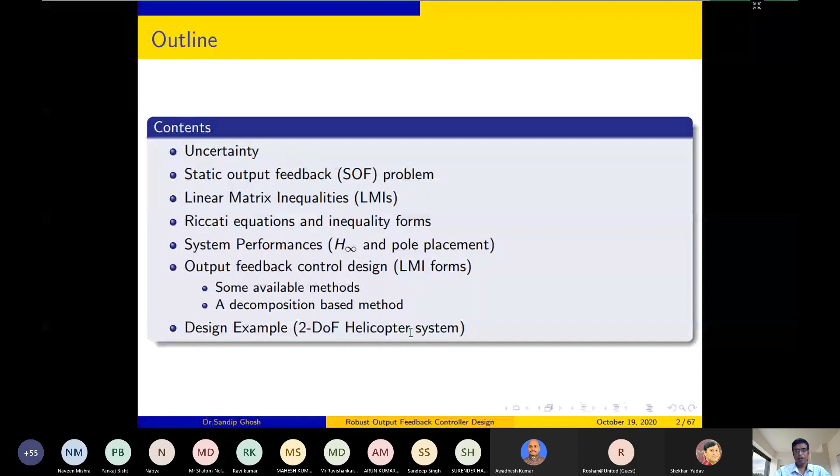So there could be many more texts, but I will highlight only the portion that are relevant to this presentation. Texts one can go through for more details beyond what I speak.

So if you start with uncertain systems, it's well known that no mathematical system can exactly model a physical one, and modeling errors affect the performance of a feedback control system. So the objective often turns out, in presence of modeling uncertainty or uncertainties in the system model, how to control a system.

The approaches, mostly we are acquainted with these approaches, if we list out, broadly they can be categorized as robust control, model predictive control, and adaptive control. So I will discuss this robust control portion, particularly in the face of uncertainties, how that can be controlled and what is the objective of robust control.

Rather, I won't discuss or compare with the other two control mechanisms that can handle uncertainties.

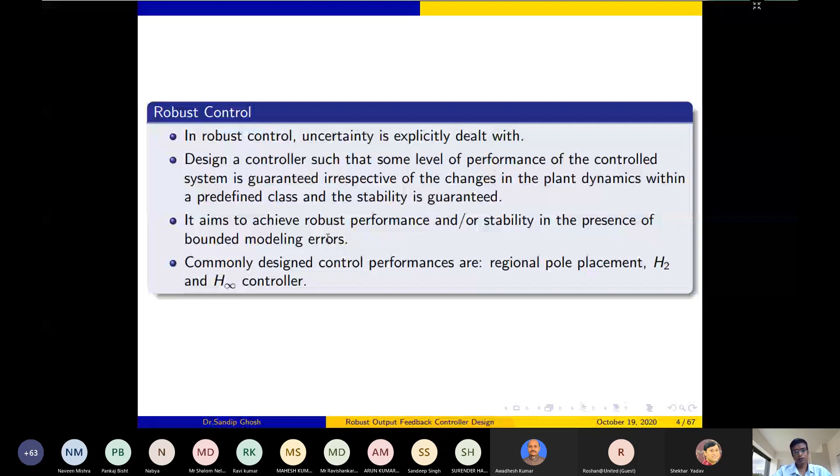I'll go through mostly state space based methods, won't go to the transfer function based interpretation for the uncertainties and corresponding performances. We'll deal with state space models, particularly the MIMO system case when there are multiple inputs and multiple outputs.

So if you consider first the robust stability, what is robust stability? If we consider a system as x dot t equal to A x t, let's say this is an autonomous system with no input, how can we say that the system is stable or not?

So if this system is considered to be uncertain, that this A matrix is uncertain and it belongs to a set, that this A matrix takes values from this set at different instants of time, we say the system is robustly stable if it is asymptotically stable for all A belonging to this set.

So that does mean something - if you consider an element of this A matrix, and the range of that parameter, and try to find whether the system is stable for each and every parameter, then you will get an infinite number of points. And that is the difficulty in solving this robust stability problem or handling the uncertainty problem.

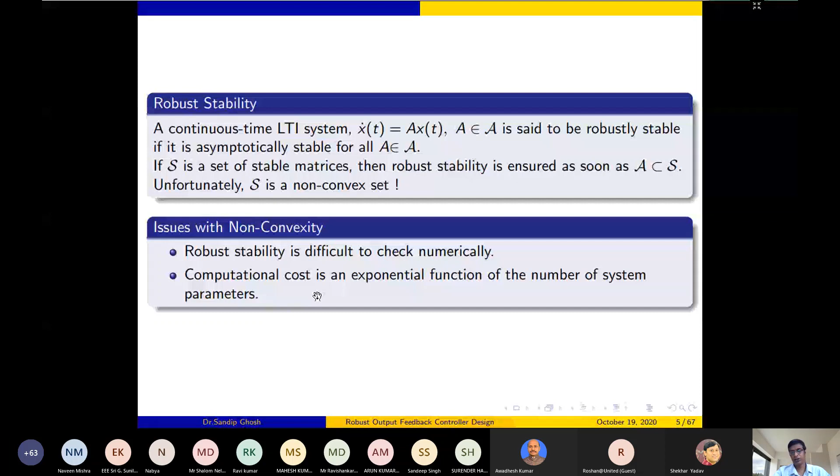That means computationally intractable, and I won't go into the convex and non-convex discussions here, but I'll mention that robust stability, from that non-convexity viewpoint, is difficult to check numerically for a given problem and data set. The computational cost is an exponential function of the number of system parameters, so as the number of uncertain system parameters increases, the computational cost increases.

This gives a difficulty: when you approximate the model to a SISO system and then implement that design on the overall system together, there will be performance deviation. So the problem becomes whether we can design the 3 controllers all together or not - then you have to deal with this as a MIMO control design problem.

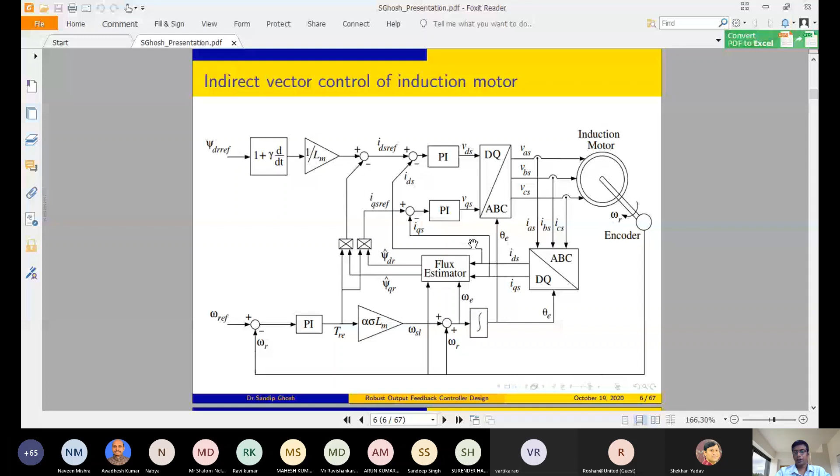So we'll start with system representation. In state space model, we define X as the state and represent its dynamics as X dot equal to a function of X, U and T. U is the control input, X is the state, and output Y is G, a function of X, U, T. We often linearize the system dynamics and represent it in linear form: x dot equal to Ax plus Bu, and y equal to Cx plus Du. A, B, C, D are matrices of appropriate dimension corresponding to the system.

I kept this S as an argument to represent that it could be a static gain or a dynamic one, meaning this could be a transfer function. For static output feedback, you choose K equal to a constant gain. If you look at this feedback structure, this is the most desirable structure - when you first look at a system given a linear model, this will be the first controller you try to design for the system.

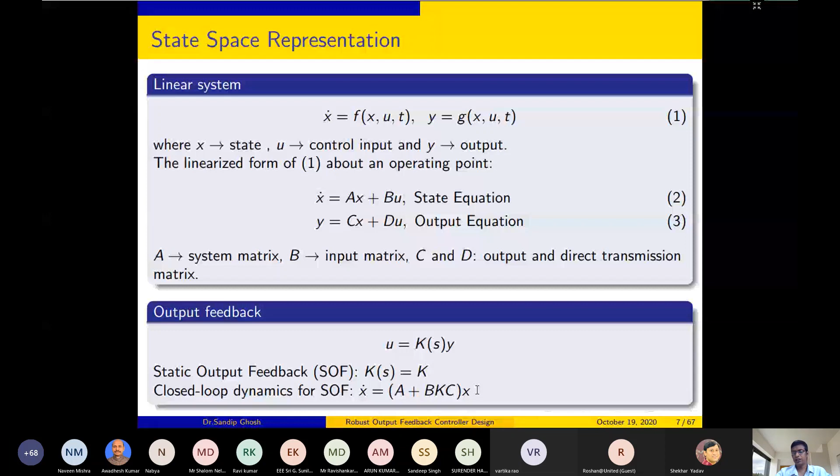Then other sort of controllers, not only that static gain, other controllers, for example, the controller has dynamics as well. Such controllers can also be represented in static output feedback form. For example, if you consider a dynamic controller that has dynamics, then this XC is the controller state: XC dot equal to AC XC plus BC Y. And the input to the plant will be U equal to CC XC plus DC Y. This AC, BC, CC, DC are the controller parameters to be designed.

So if you try to design such a controller, then how to design this? If you consider that this controller state XC has only a single state, then that will be a first order dynamic controller. And you can think of a corresponding transfer function, similar to a compensator structure.

Lag or lead compensator, as you have seen conventionally. Then if you consider higher order, for example, there are two states in this XC, then you will get a second order transfer function, and so on.

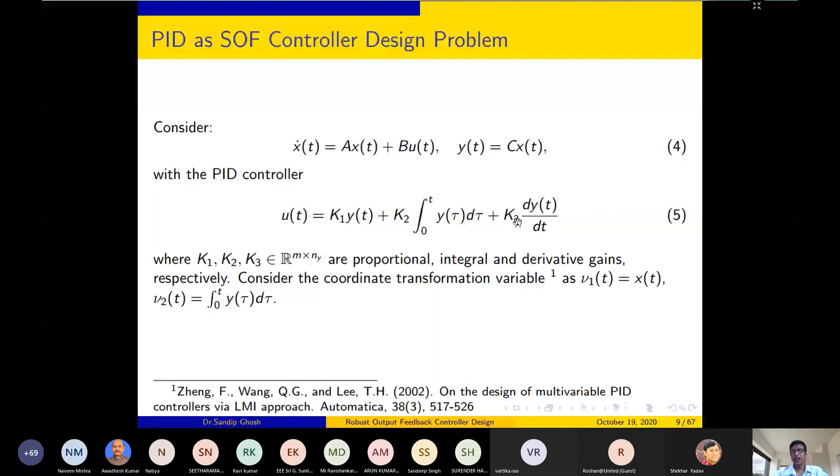Except that this K3 dY term, as you replace YT equal to CXT, gets combined to the left hand side, and then you can manipulate and find a general form like this. So this again comes into that same linear system form.

And if you consider that this term is invertible, particularly corresponding to the derivative gain, if we can keep this invertible, then UT again you can choose as a static feedback controller with K bar to be designed. And this K bar contains the PID gain control parameters K1, K2 and K3. So this maps back to the PID gain parameters. So if you can design this K bar as a static output feedback problem, then you can compute back K1, K2 and K3, the gain parameters.

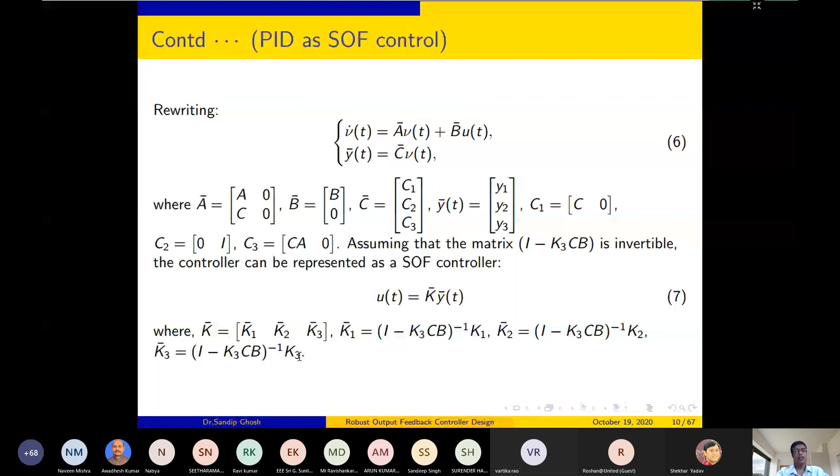So many such problems can be represented as a static output feedback problem. Then the question arises, what are the difficulties with such design?

You will see other situations, for example, the induction motor example I put up at the beginning. In that case, restricted feedback is present. That means from one particular output to another particular input, there won't be any connection, and you are forcing those elements to be equal to zero. For example, only the diagonal elements are non-zero and are to be designed. So for this case, we call it strictly decentralized.

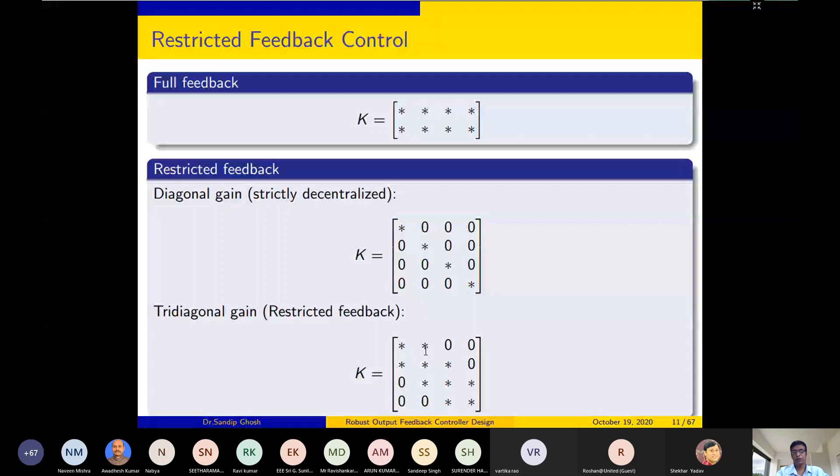So the first attempt can be made. I will introduce the tool that can be used for solving such problems: the linear matrix inequalities framework.

For a linear matrix inequality, you have decision variables to find out, x1 up to xn, and f0 to fn, these matrices are known. x1 to xn are variables that have to be found satisfying this less than 0 criteria, that this matrix fx is less than 0. When inequalities are in such form, they are called linear matrix inequalities, because x1 to xn, the parameters to be found, are in linear form. If you consider this one is 0, otherwise it is affine form, but it is commonly called linear matrix inequalities.

Many control problems can be represented as linear matrix inequalities. For example, the Lyapunov stability case: given a system x dot equal to Ax, how to say whether the system is stable or not in the Lyapunov sense comes as a linear matrix inequality, A transpose x plus x A transpose less than 0, with x greater than 0. You try to find an x satisfying these two inequalities, which is itself greater than 0, and this condition is also satisfied for given A.

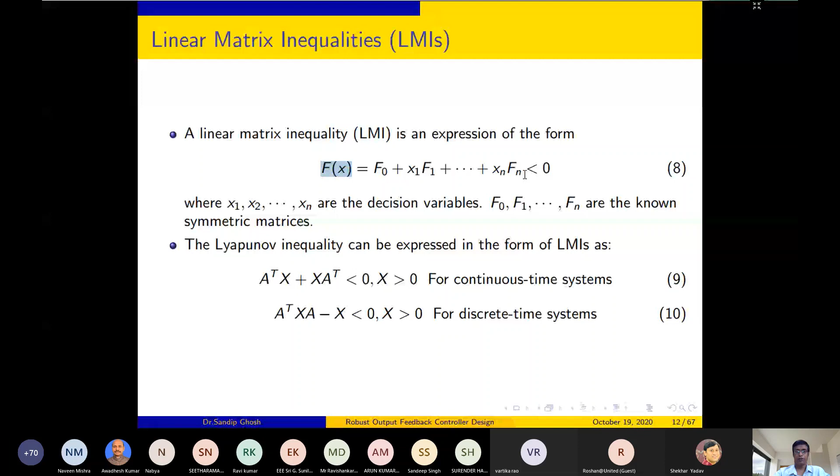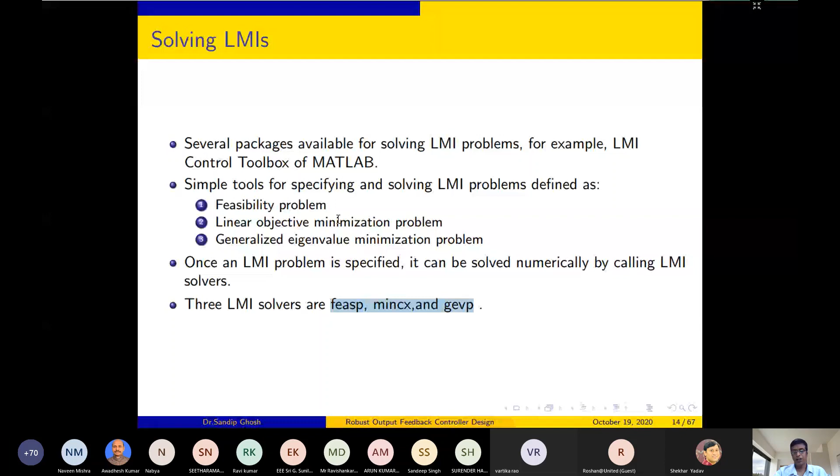These are the three MATLAB-based LMI control toolbox solvers available, corresponding to these three LMI problems. I will demonstrate the first one: the feasibility problem.

The feasibility problem is this: x equals, these are the decision variables. X is a vector containing x1 to xn, and it satisfies F(x) greater than 0, this inequality problem, where F is a matrix.

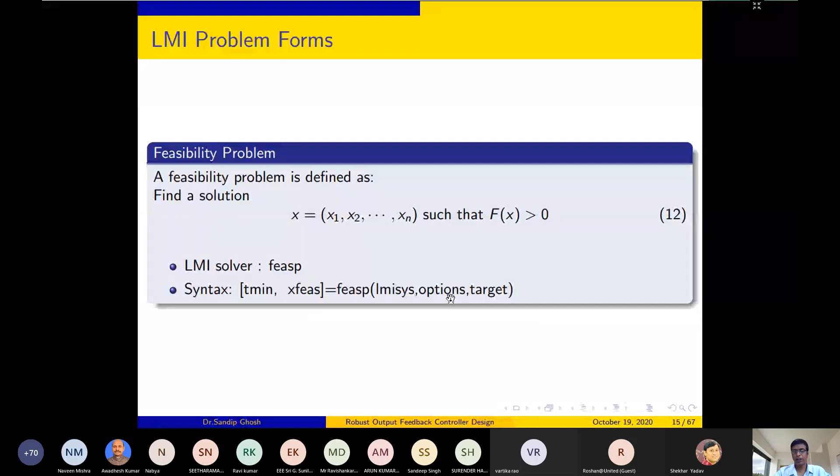The corresponding LMI solver is FEASP, and this is the feasp command in the MATLAB LMI control toolbox. If you see the MATLAB code you have to write for this, consider that these are the two inequalities, and you have to solve for P.

Consider the problem of solving P greater than I and A transpose P plus P A less than 0 - that's a stability problem. Input parameter A is known, a 2 by 2 matrix, and these are the two LMIs, how we define them in terms of the defining variables and these inequalities, then finally we call our solver.

First we define that P is an LMI variable; its structure/syntax is so. Then we define the two inequalities: the first one corresponds to P greater than I, and the second one corresponds to the other inequality.

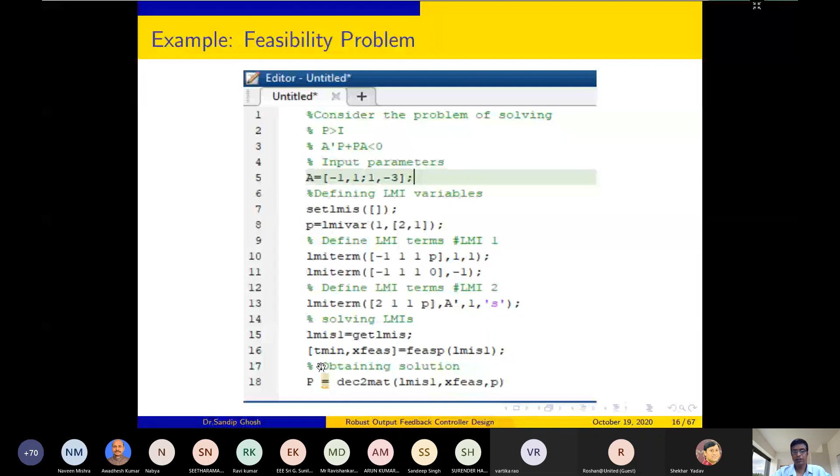Then we accumulate all the LMI terms that we defined, and call the FEASP solver to solve this, getting back P from the solution. This is what the solution looks like - it converged and gave a feasible solution.

The best value of T is this, and it should be negative for feasibility. T value should be negative for feasibility, so this was a feasible solution.

If you extract the p-value, this is a p-value from the set of possible p's. I say set of possible p's because this is an inequality, so it may be feasible for several different p, and it just gives a particular solution corresponding to the whole possible set of p that satisfies this inequality.

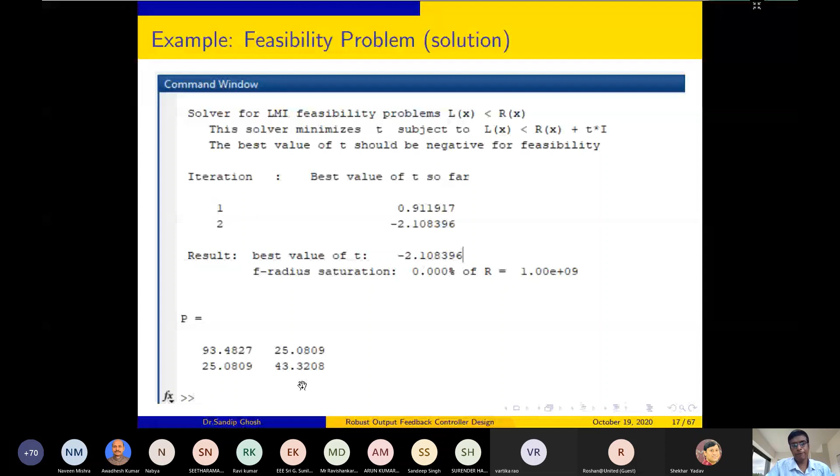Then the other problem is the linear objective minimization problem. Here, not only is the constraint fx greater than 0 present, but an optimization objective is also added.

You can see this is the combination of the decision variable C transpose X, with C a known vector. As you multiply C transpose X, this will be a linear combination of the vector elements x1 to xn, and you can solve this using the mincx command.

If you look at the syntax for solving such a linear objective minimization problem, here is an example: minimize trace of x subject to these constraints. This can be represented - even though this x multiplication is there - you can represent it in this form.

This is an LMI, and correspondingly the A, B and Q values are given.

Similar to the previous case, you define the LMI variable, define these LMI terms using these syntaxes corresponding to this set less than 0. Then call the mincx function to solve this, and finally obtain the solution that minimizes this linear objective.

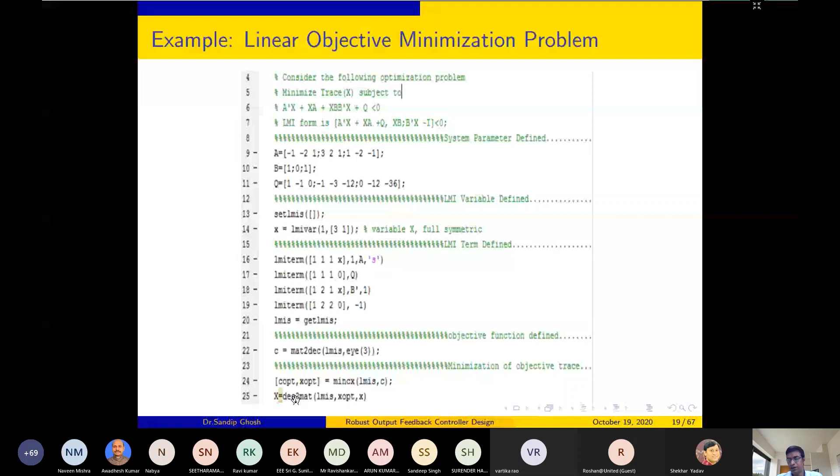So solving an LMI problem numerically is easy. Toolboxes are available, and if you can frame a problem as an LMI problem, then it gives a global solution, because this is a convex problem. So if a solution exists or it converges to a solution, then obviously there exists a feasible set, and if it does not, then there does not exist a feasible set.

And it is solved using iterations. I'm not going into details of the algorithms used to solve it, but you can see that it is solved using iteration, and finally it converges to a particular minimized value.

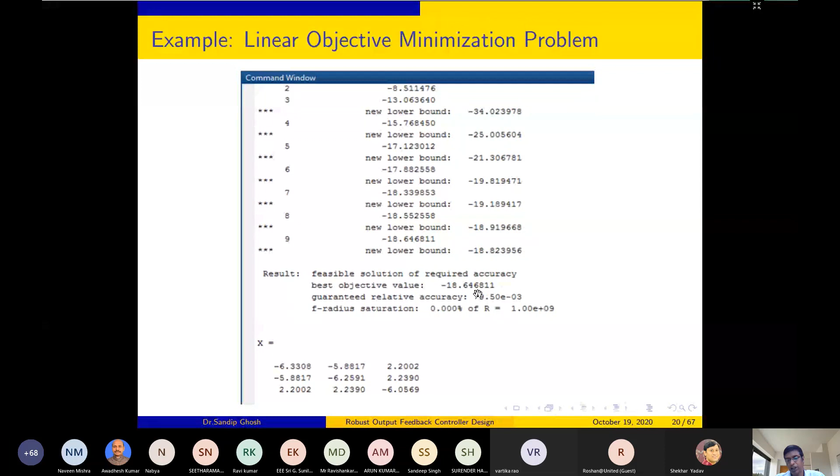I'll move on from here, and we'll show formulation of matrix inequality or linear matrix inequalities problems for some of the simple cases, and we'll show some of the solutions for complex cases.

So here we introduce that stability, quadratic stability, which is the downstream of Lyapunov stability. For nominal systems case, x dot equal to Ax, we consider a Lyapunov function as x transpose P x, where P greater than 0 is a positive definite matrix.

Then the states will converge gradually, because V(x) is defined over this x. So as the value of V decreases over time, this x will decay, given that P is constant. So that shows how x will approach its origin or the equilibrium point for linear systems.

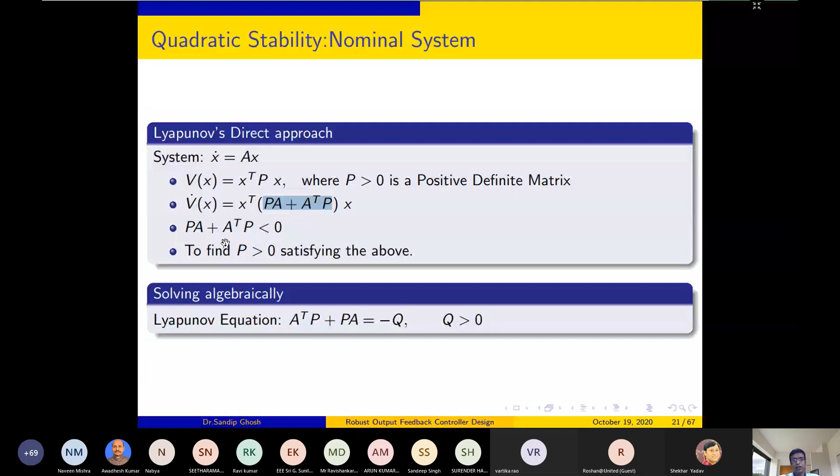But the alternate form of this is that you solve this condition as an LMI and find a solution P greater than 0.

The same if we try to extend for the robust analysis case, particularly when the A matrix is uncertain, then how to represent that problem or how to tackle that problem.

So we'll say that a control law is robust if it is valid over the whole range of admissible uncertainties, mostly offline design. That's why it is cheap, particularly for implementation. And the difficulty is that the uncertainty modeling is difficult. You should have known the parameter variations for a particular parameter. If you consider uncertainty, you should measure that this varies within this to this range. So that information should be known.

Obviously, there are other cases when this is not known. Still, you can consider a range of that and do trial and error. So the robust stability is difficult to check, as I discussed at the beginning, and this is exponential in the system parameters.

So the solution could be in that quadratic analysis framework using Lyapunov's direct approach, where we define V and we ensure that V dot is less than 0. So if this is less than 0, then what happens? Then states will come to the equilibrium point because this V will decay and x will decay.

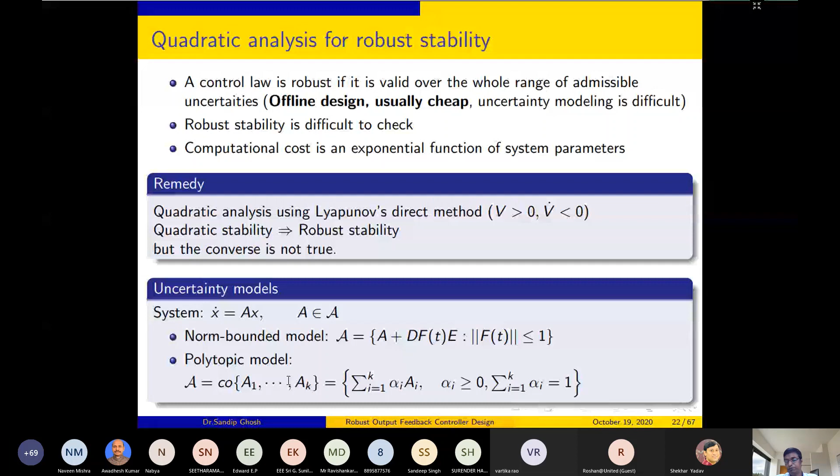For this representation, or for the linear system case, the benefit is that the particular structure of the Lyapunov matrix is known to us for linear systems, and that works. This structure is known: X transpose P X, with P greater than 0. Then as you take the bound for this, replacing it in V dot, you get a condition like this.

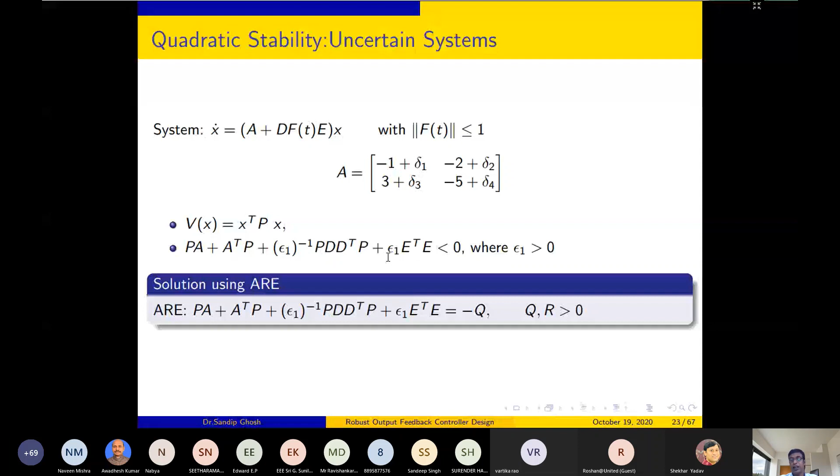Consider the state feedback stabilization problem. The objective is x dot equal to Ax plus Bu, and u equal to Kx. Then the closed loop system becomes A plus BK, and the stability condition will be A plus BK transpose into P, as you replace A plus BK in place of A, this will be less than 0.

This appears to require finding both P and K, and as you multiply, this will involve P, B, K, and there will be multiplication of P and K elements. So it appears as a bilinear matrix inequality, because multiplication of two elements is involved, and you will get P1 and K1, elements of P and K, whose multiplication gets involved.

In the Riccati form, we generally assume a particular structure of K, minus R inverse B transpose P, replace K here, equate this right hand side with minus Q, represent this again in Riccati form, and solve for P to find K. In the LMI framework, even though this looks like not a linear matrix inequality, you can still convert it into one.

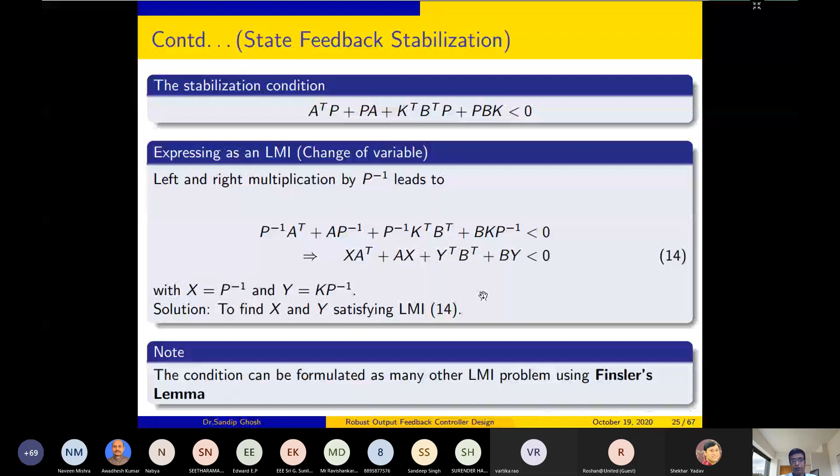So many such problems can be represented as an LMI problem, and we can solve and check that numerically. This is the case for solving the state feedback stabilization problem for polytopic systems.

As I equal to 1, you will have one inequality involving X. If I equal to 2, you will have another inequality, but X remains the same. So for all the I's, you define all the inequalities, write them, and solve for that single X satisfying all the I cases.

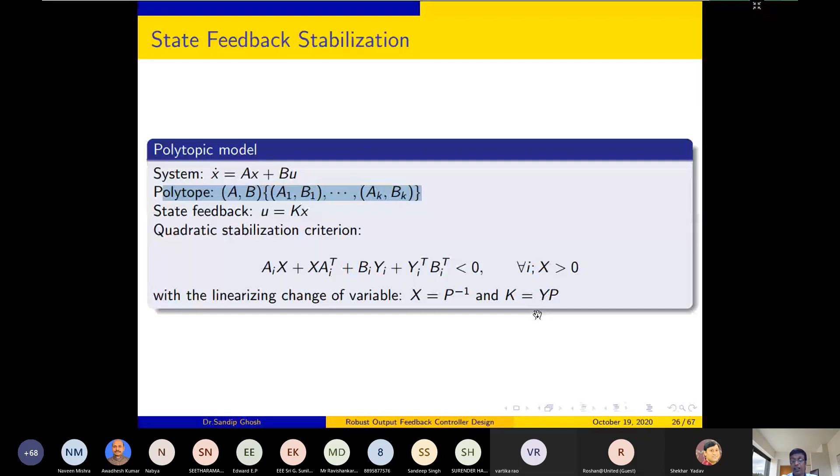When you have two poles, we can map that damping ratio to the second order case. But when you have several poles in a higher order system, then it's very difficult to do that.

So rather than that, if you can say that all the poles are within this damping region, then minimum damping criteria is satisfied. So whatever be the number of complex poles, if they satisfy this minimum damping, their combined response will be this damped response of all these combinations. So this is one of the basic performance criteria when you design controllers, that minimum damping is satisfied.

Other criteria often given is that it satisfies minimum decay rate. So it's not the imaginary axis, but slightly shifted towards left with this alpha value specified, as e to the power minus alpha t. That will be the minimum decay rate that defines how fast the system poles will decay. If alpha is large, then your poles will decay fast, and if alpha is small, then it will decay slow.

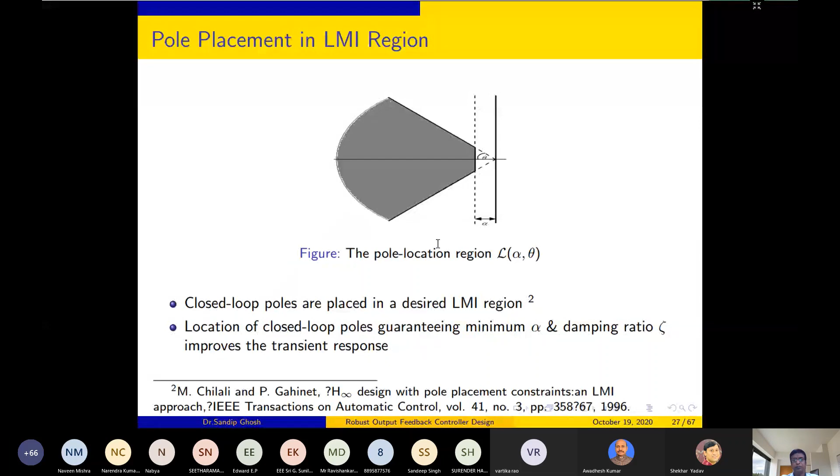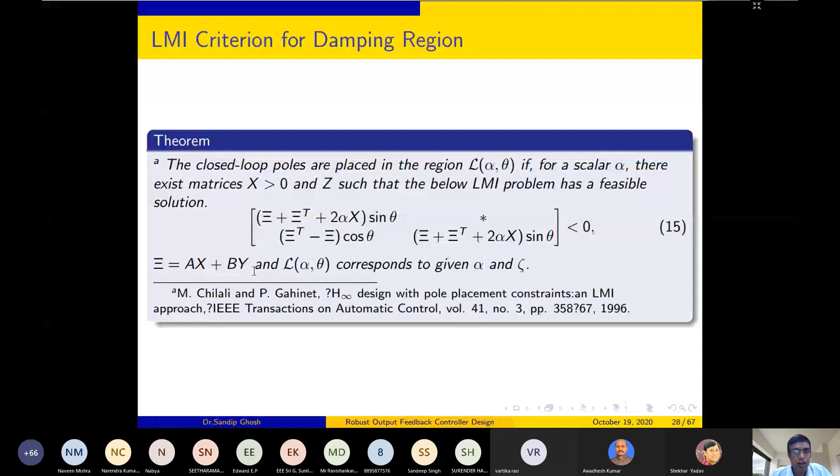Then other performance criteria are that the H infinity state feedback controller. So for H infinity control, from an input or disturbance input to a desired output, the transfer function's infinity gain is less than gamma. And if you can minimize this gamma and consider that the input is a disturbance and the output is a desired one, then from that particular input to output, the gain will be minimum. The H infinity gain will be minimum. So that is one of the performance criteria.

Often dealt with in robust control framework. But however, the modeling of uncertainties, how those are modeled, and designing in the H infinity framework, those interpretations and definitions are not discussed in this lecture. But still, for some problems or in some cases, we can define it directly from the state space model. For example, the nonlinearity that we neglect while obtaining a linear model, those we can consider as disturbances. Then there are other modeling efforts so that this disturbance and the corresponding desired output can be modeled.

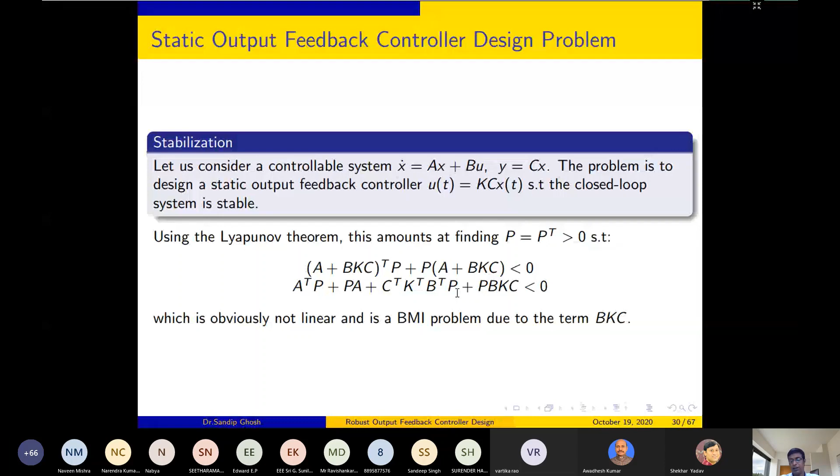Some of the approaches available: people have developed how to convert this, how to approximate this as an LMI. So we'll see some of the approaches. For example, this is an iterative LMI method.

In this iterative LMI method, that particular inequality is converted into this form. This one you can further represent as an LMI, given that this x is known, and this p and k are variable. So then this will be an LMI, and this will be an approximated version of this, with x equal to p.

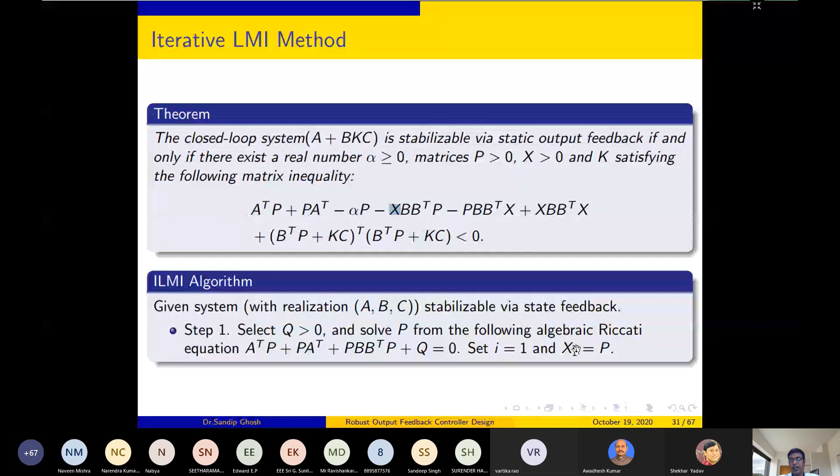So what happens? We want to solve for this p with some initial value of x, and then iterate over this so that x and p converge to each other. First a solution for p is obtained, and then x for the first iteration is assigned equal to p. Then iterate: once x is known or an initial value is taken, you solve this as an LMI, then go on solving and updating the x value using this p so that it converges to some solution.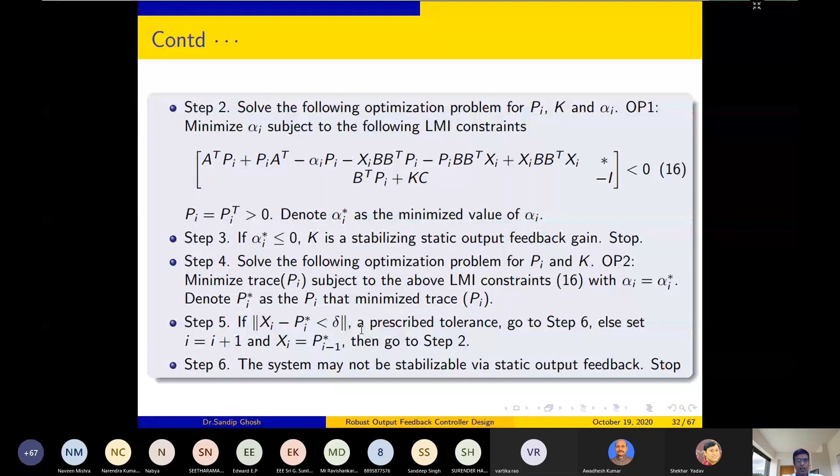So step 2 will be, for the ith iteration, solve this optimization objective. Then finally, when the norm of x minus p is less than delta, some pre-specified value of error, then you will say that it has converged. So that is one of the iterative methods for solving the static output feedback problem.

Other ways are that you directly approximate that bilinear matrix inequality as best as possible and represent it as an LMI itself, rather than iterating over x and p.

So this will be a general representation of the H-infinity control problem: x dot t equal to a x t plus b w w t plus b u t. This is the control input. This one will be treated as the disturbance input to the system. This is the measured output, meaning y t will be used to construct the control input, and this is the desired output — desired in the sense that we'll try to minimize the infinity norm corresponding to this input to this output. In cases you can consider y t equal to z t if it is not appropriately defined.

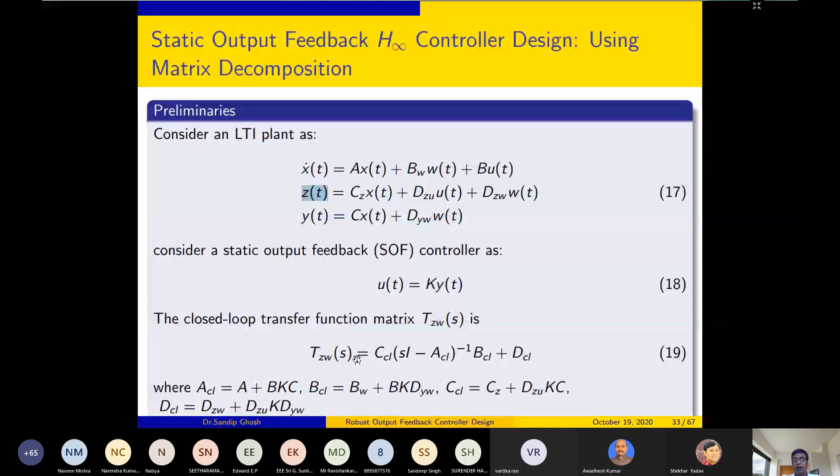Then if you take a static output feedback for this, the closed loop system for w to z will look like this, with the parameters defined this way. Then we'll try to minimize the infinity norm for this, and that you do using the BRL lemma, the bounded real lemma.

This is the result corresponding to the bounded real lemma: the infinity norm of T_zw is less than gamma, and the closed loop system matrix is Hurwitz, meaning stable, if there exists this P greater than 0 satisfying this inequality. So this A_CL contains the BKC term, and when multiplied with P, this becomes a bilinear matrix inequality, which is difficult to solve.

An alternate form of this is that if you pre- and post-multiply by P inverse, you get that X is post-multiplied to this A_CL compared to P multiplied to this A_CL.

Since BKC is involved, we approximate this using the range space and null space of the C matrix. So the Lyapunov matrix X is decomposed using QC and RC, these two matrices.

And if you write Y equal to KCX, this term comes as YC into RC transpose plus this nonlinear term. YC into RC transpose basically gives us K back with this change of variable, but you have to take care of these nonlinear terms.

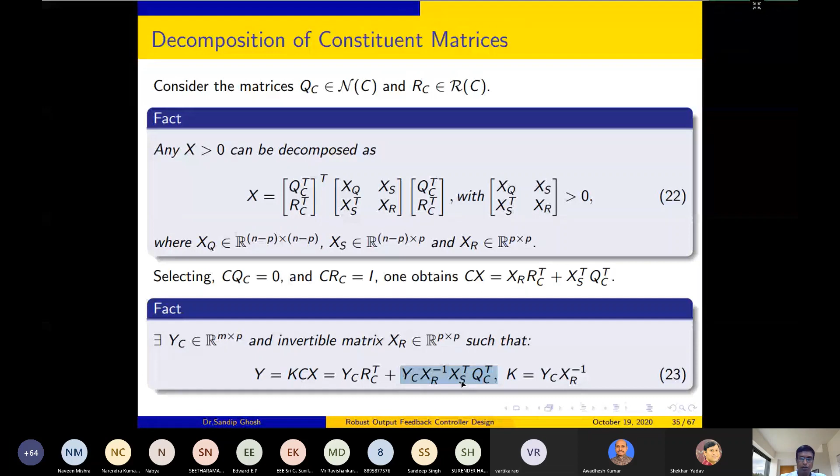So we take care of that by further manipulation and obtain an LMI corresponding to this, and it will look like this condition for the static output feedback control problem. So if you find a solution for this that is less than 0, with appropriately defined system matrices and variables, then T_zw will be less than gamma.

So that is one of the approaches, obtaining a sufficient condition corresponding to that bilinear matrix inequality for the static output feedback problem. The benefit is that if you find a solution for this, many control problems can be solved using this algorithm. And obviously, since approximations are involved as I've shown, these conditions are sufficient and conservative — they may not capture the exact optimal conditions. So there is always hope for improvement in such designs.

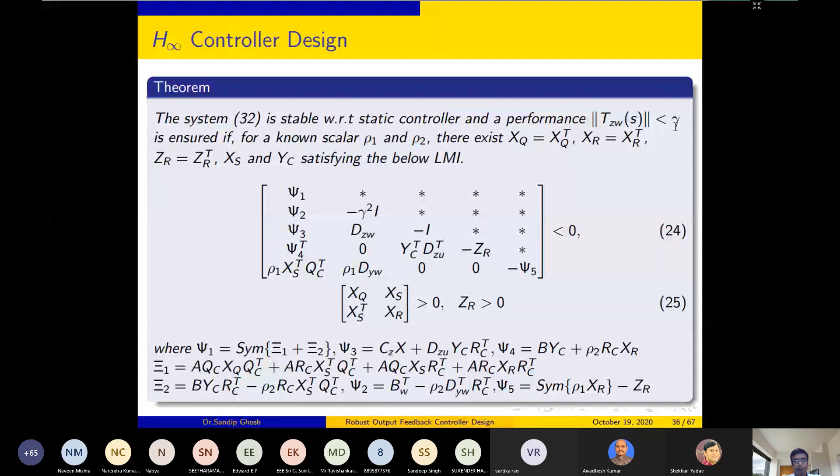So then you design a controller K equal to this. In this LMI framework, compared to what we did for the algebraic Riccati equation, this is the structured form of K you can design. For example, if K has elements K11, K12, and certain elements are not there—they equal zero—then you consider the variable XR to be diagonal, and YC takes the structure of K. If you solve this LMI, you get back the control gain in this particular form, which you can then apply to your system.

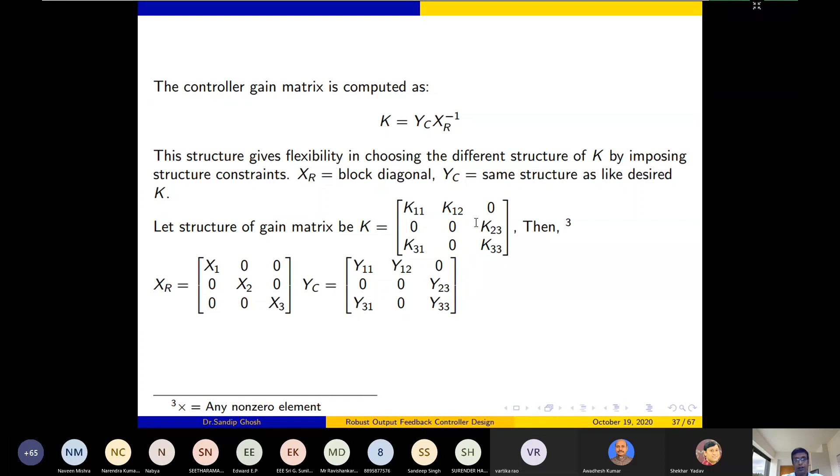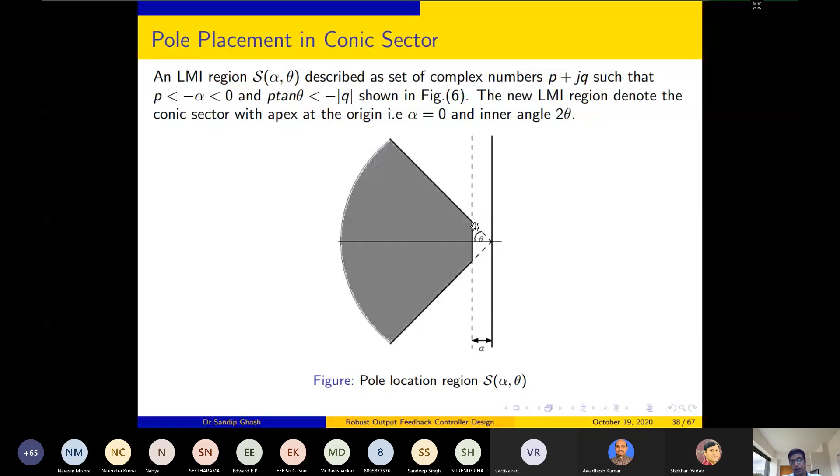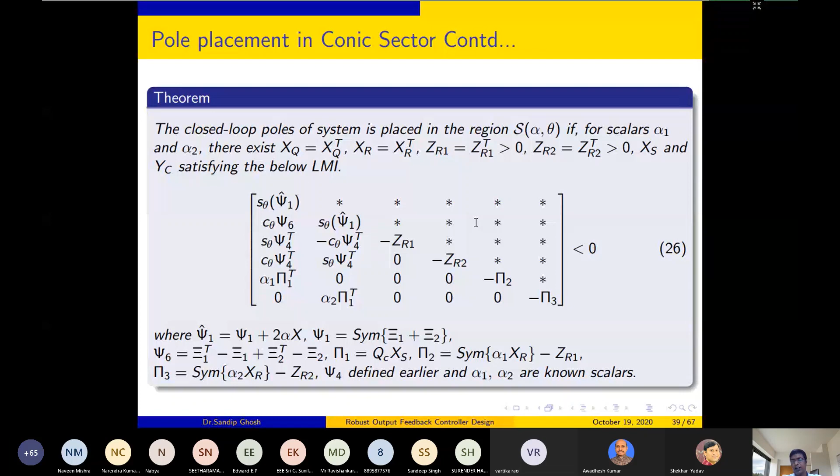Not only the H infinity control problem, but also pole placement in a conic sector can be approximated and solved using an LMI based solution. I won't explain the full derivation, just give an impression of how the inequality looks. To solve it, you define the variables, look at the terms, expand them, and then finally solve this, giving you the performance criteria as well.

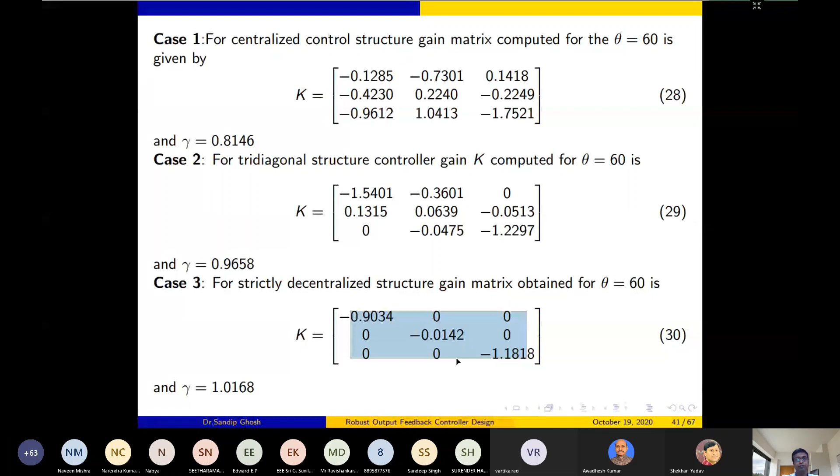Now I'll take up an example for a laboratory scale helicopter system. This is a Quanser made laboratory scale setup for a 2 degree of freedom helicopter system. The objective is to keep this helicopter model fixed at particular angles in two planes. The model can be described as this: the states are x1, x2, x3, x4, which are the pitch angle and the yaw angle in the two planes corresponding to the 2 degrees of freedom, and the corresponding velocities—these are the four states.

If you see this, this is a nonlinear model. So how have we handled this nonlinear model? Well, we linearize around an operating point and design the controller corresponding to that. Its limitation is that as you approximate using the Jacobian or Taylor series approximation, you neglect some modeling errors, so the controller you design may not perform well on the actual system or actual model.

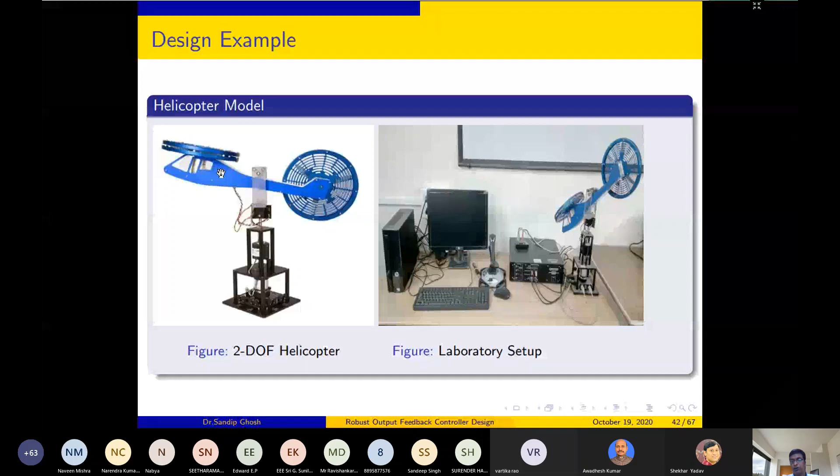Now, looking at the control inputs, there are two control inputs. We have two rotors, one in this direction and another in this direction, so two inputs corresponding to the two rotors—this is a MIMO system. You can consider that both angles are measurable, so if you take only both angles, this becomes an output feedback problem. If you also find the derivative to determine velocity, you can consider this a state feedback problem. But in both cases, there are two inputs you have to design.

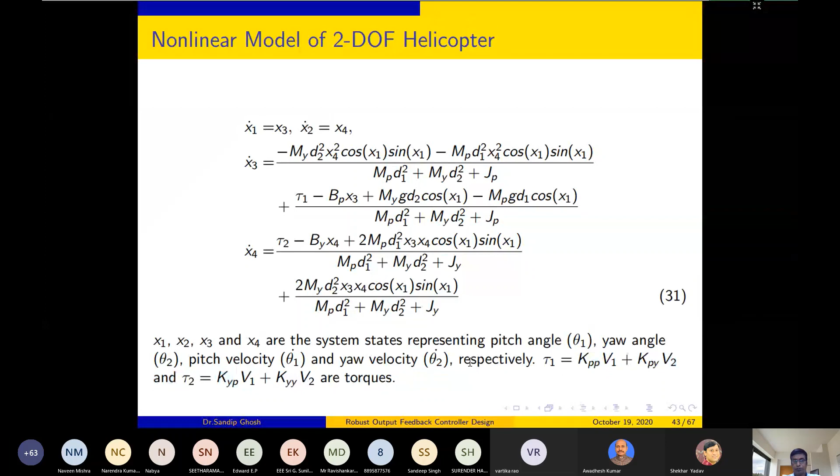So these are the parameters of that 2D helicopter model. I'm skipping this one. And the objective that we defined is that...

x1 is uncertain but bounded, considering that x1, the particular state, lies within a range. If we define this one as an uncertain parameter, then we can find a bound for this parameter. Then this model will be a linear uncertain model, and we can design a robust controller for this.

So the assumption is that we are considering the variation of the pitch angle, that it remains within a particular range. So that is a particular modeling consideration in the direction of robust control, that you have to model it as best as possible. So if you consider a larger range of this pitch angle, then your uncertainty range will increase, and the control will be applicable for a larger range of that pitch angle.

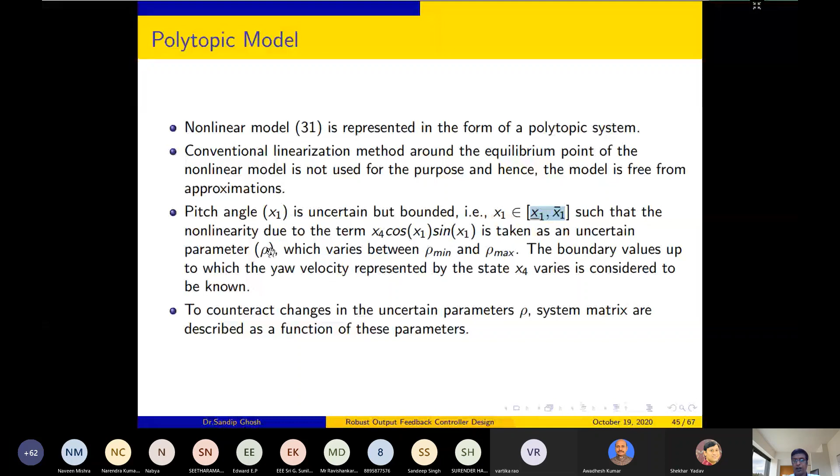So then as you define this one as an uncertain parameter, the model will be like this, that A will be a function of rho, plus this can be defined appropriately as you define. We have defined it this way, that BW is this, and CZ equal to all these states, and we will try to minimize the effect of this W1 particularly entering into this channel to all these states.

And this is a rho matrix, so this depends on this rho parameter, this uncertain parameter. Except for this one, this model becomes linear. So when you take the range of this rho, then you can represent this one in either that norm-bounded uncertainty form, or in the polytopic form.

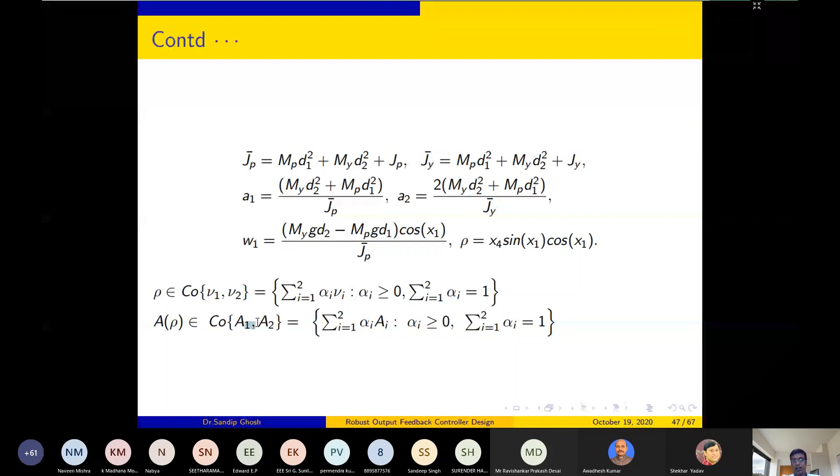So we took up the polytopic representation. So we took nu one and nu two. Since this is a single rho element or single uncertain parameter, we will have two vertices. So we will have that A1 and A2, two vertices. So that we obtain.

So once we obtain this one, then the control problem, we can see that this is your twin rotor MIMO system or that helicopter. It has four outputs, and mostly that PI feedback is used because you want to make that error equal to 0.

So when you go for using that PI feedback, I don't know how many of you tried to use an integral feedback, particularly with the state feedback controller, and when particularly angular references are given, that you maintain the pitch and yaw angle as so and so.

So if you look at this structure, and particularly compare the output or the position with the reference position or the angular positions, and then generate the error and try to design a PI controller corresponding to this, then you can see that this input is not interacting with this controller, and this input is not interacting with this controller. So this is in structured form.

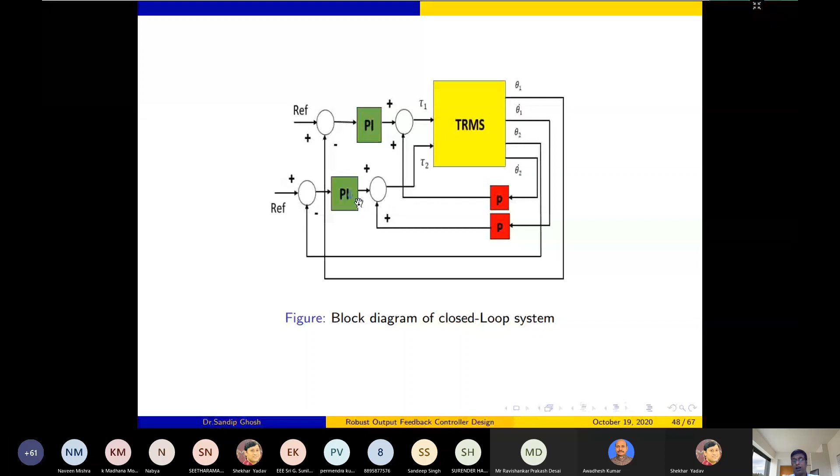So if you try to implement the controller in this particular structure, rather than the centralized one, you have to design the controller in this particular structure. So we take up different such structures and define the control problem, and design this.

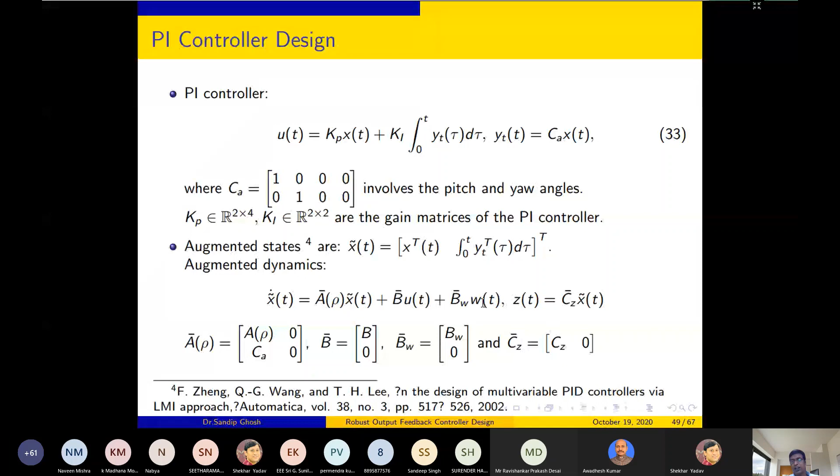So we took up that PI form KP into XT plus integration of this YT, we defined as the two positions. This is the first position, this is the second position, pitch and yaw equal to C into XT. Then define this one in that static output feedback framework, similar to that we discussed at the beginning.

Then this one will be K equal to Kp into Ki, and from this X tilde T, you will feedback, or will generate the control input u.

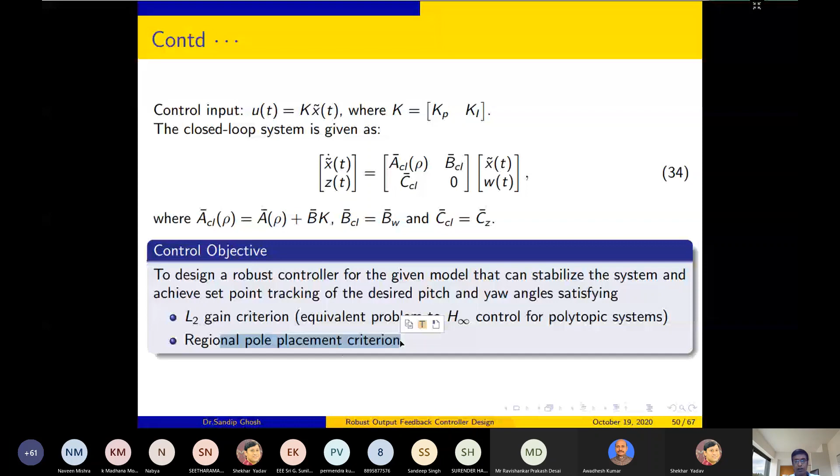These are the numerical values of that A1, A2. So you can see, okay, this should be -- this is minus 0.3905 and this is 0.3905, and this is here plus and this is minus. So these are the two vertices, and the uncertain model that lies within these two vertices, or a linear combination of these two.

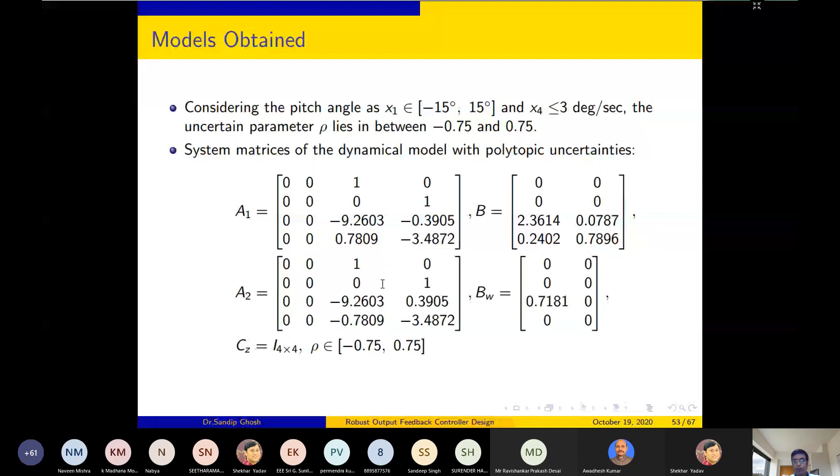This is variation of the pitch angle, which we compared with other existing controllers, including the robust PI centralized one. Centralized means it takes all the inputs and generates all the outputs, and the control feedback is not particularly structured. We also compared optimal LQR and LQR.

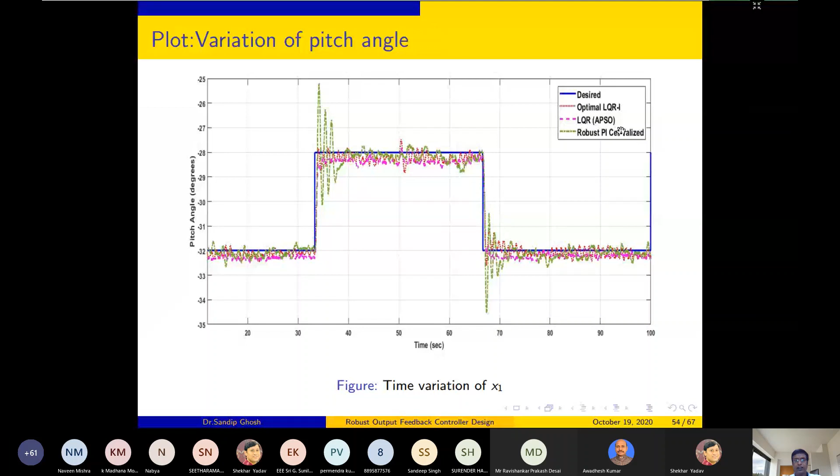So in all the cases, it works as you design using this. And this is the response of the yaw angle. This is a comparison for the centralized and decentralized case.

So that does mean that as you consider the decentralized or diagonal control design, not the centralized one, this red one is the decentralized one and the green one is the centralized one. You can see that response is almost similar for the pitch angle case, with the centralized one giving slightly higher oscillation.

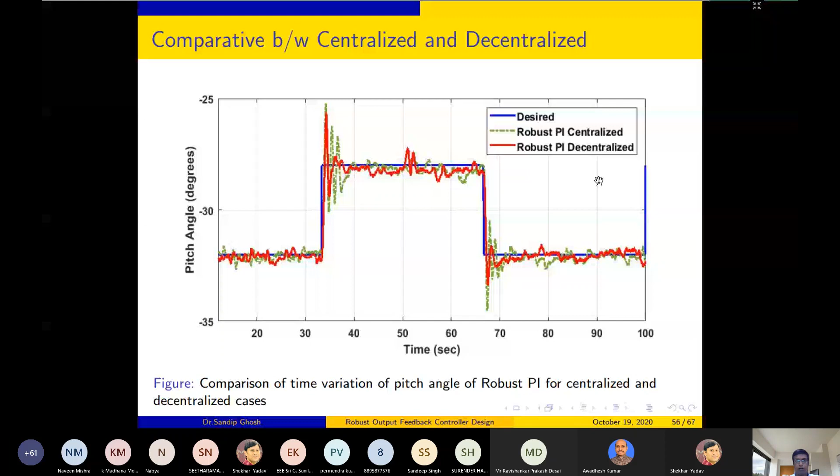That could be because of the coupling of the two plane dynamics. If one is oscillating against the other, for the decentralized case, that coupling is not there through the control feedback. So in that case, you might get lesser oscillations, but it's not necessarily due to that particular structure.

And then variation of control input are this. So this is for the pitch angle, and time variation of the control input for the yaw angle. The left hand side one is the centralized case, right hand side one is the decentralized case.

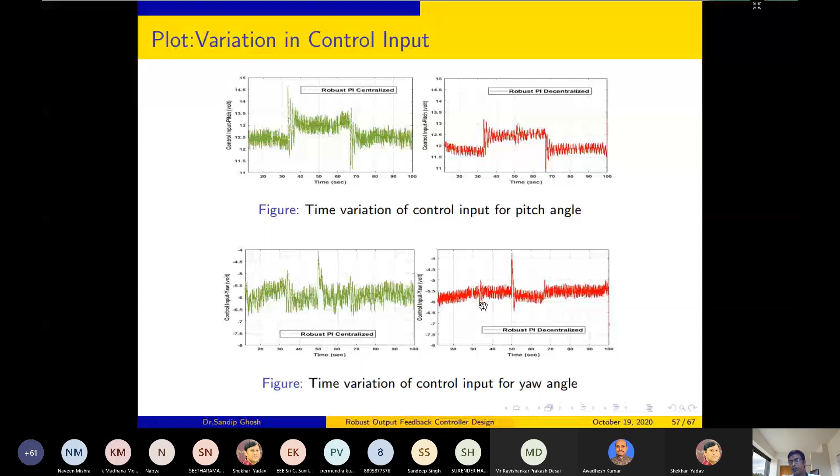Then comparison of controller gains. If you see that the centralized case, it uses the full control gain, whereas for this case, we have structured control gains. That means we don't feedback from one output to another input. Only that pitch angle control input is generated through the pitch angle output, and similarly for the other one.

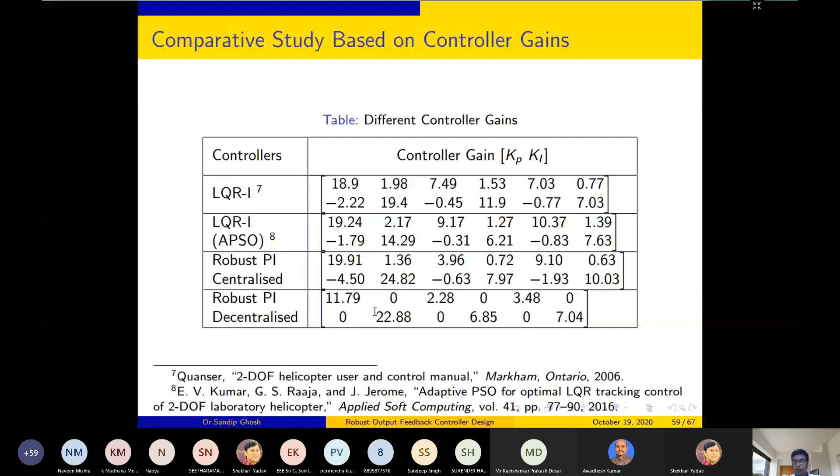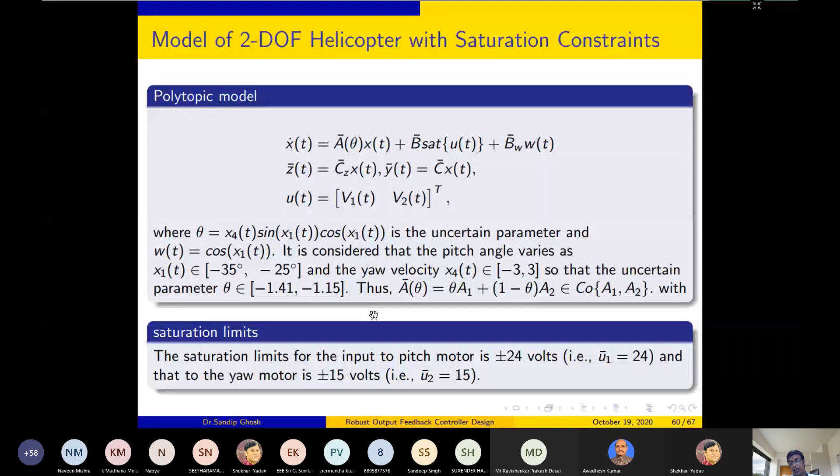Then as I have shown that you have to keep the control gain minimum. So what it would be if you consider the saturation constraint as well, rather than reducing the control gain arbitrarily. So that also can be represented as an LMI problem and can be solved in this framework. So we solved that problem as well.

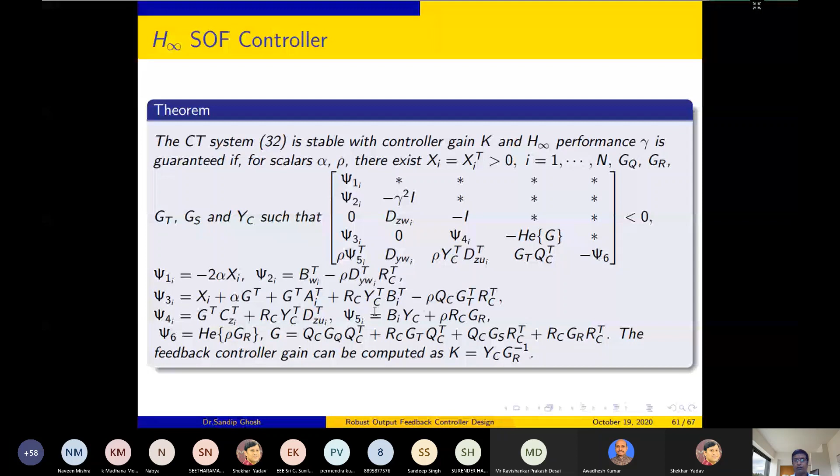And this is the LMI condition corresponding to this. And we have again an output feedback PI controller, this one. But the centralized one, control gain equal to KP and KI, for the two cases. So we have four gains corresponding to the four outputs and two inputs.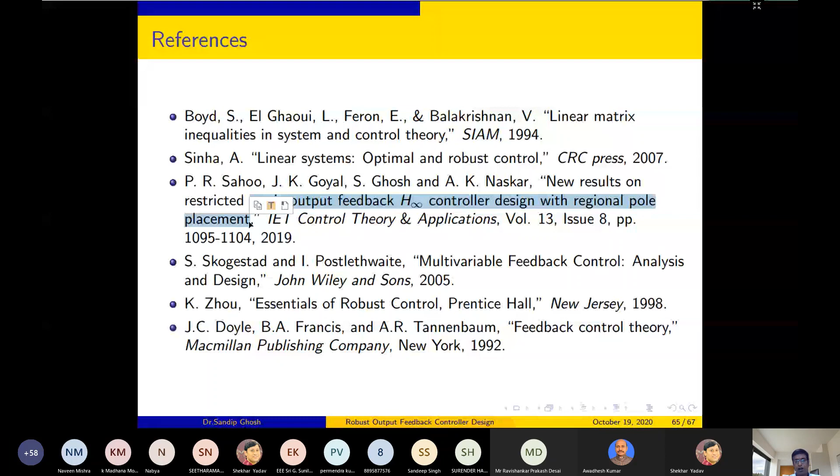So these are some of the references. First one is the classical book on linear matrix inequalities. There are other books. This is one of our recent publications on static output feedback control design, particularly in the H-infinity control and regional pole placement, which can be applied to so many applications. And others are classical books and some references from output feedback.

So I'm finishing here. Thank you for listening.

Thank you very much, sir. So I hope I have finished on time, right? Yes, sir, exactly on time.

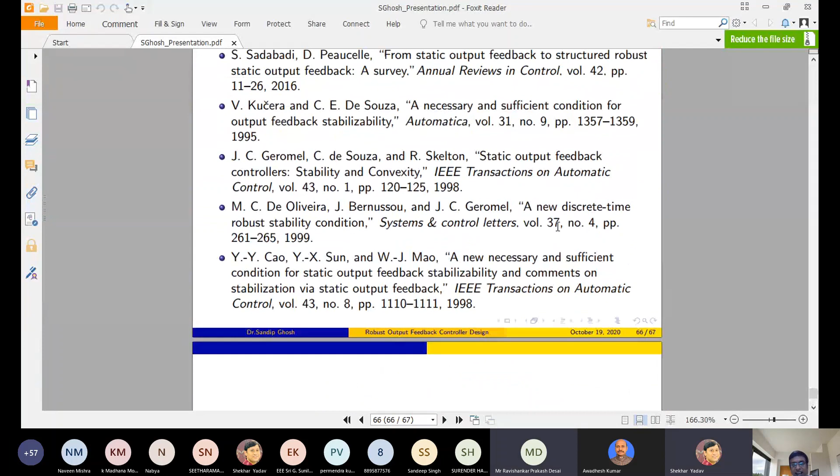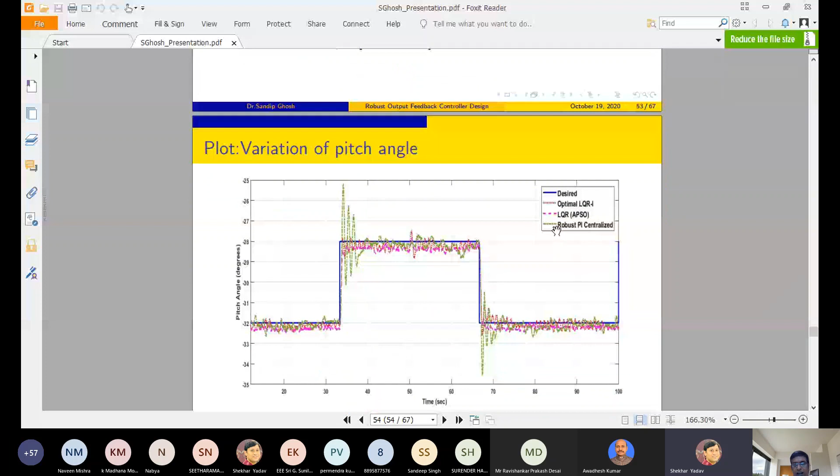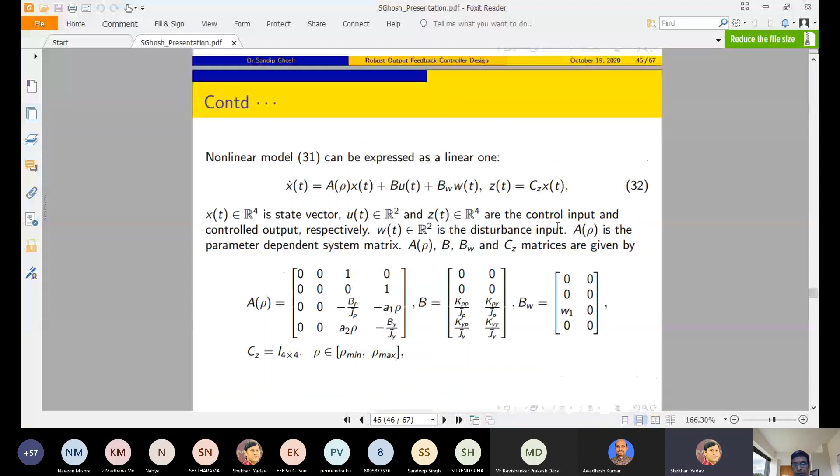So thank you for your question. I'll go back to that application slides. It is slightly tricky, and we published few papers in this line, particularly considering the model with the nonlinear parameter as an uncertain one.

Okay, so if you look at this model, here this x4 cos x1 into sin x1 — if you consider this x4 cos x1 into sin x1 as a parameter, then this one will be my d2 square into some parameter into x4. So that's a linear one, right?

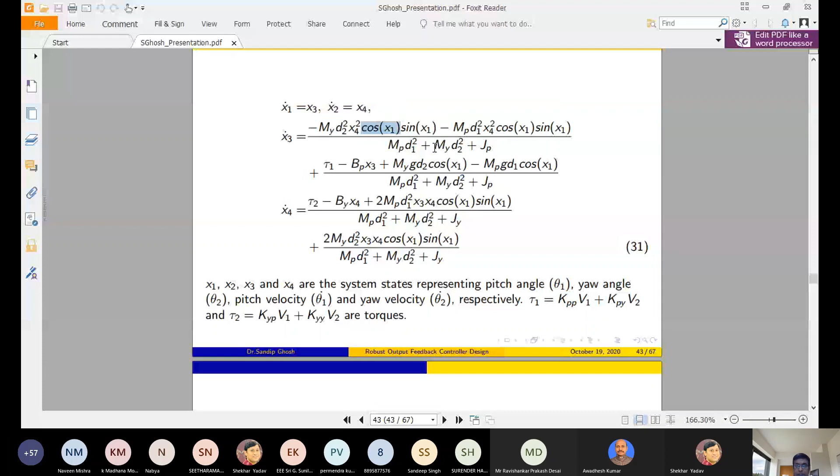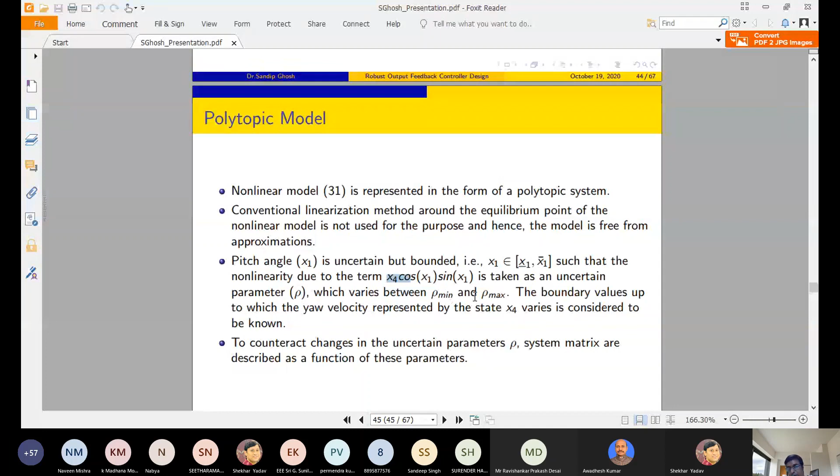So if you consider that way, that x4 cos x1 into sin x1 is an uncertain parameter, considering the bound for this x1 and x4, that this will operate within this range, then this rho will be an uncertain parameter and will appear in that particular model. The remaining portion then will be linear. So the same thing we applied for the input or other nonlinear terms.

For example, if you consider this term as well, this will again be that rho parameter that we defined here. And when you consider this as a rho parameter, considering the range of this x4 and x1, then this element will be uncertain, and this will get multiplied with this, and the whole term or element in that matrix will be uncertain. And this x3 will remain, and that will correspond to a linear element.

Are you following? Then we have not linearized the model around an equilibrium point at all. So we did obtain the linear model by approximating those nonlinear parameters, or defining them as an uncertain parameter and taking the range of that. So that modeling portion is tricky for robust control cases.

And then once that is defined, we define a polytopic model. Obviously, that is an approximation when you consider the ranges of x1 and x4. And further, you can improve control performance by using LPV controllers and other controllers if you know that particular rho parameter. So that scope is there.

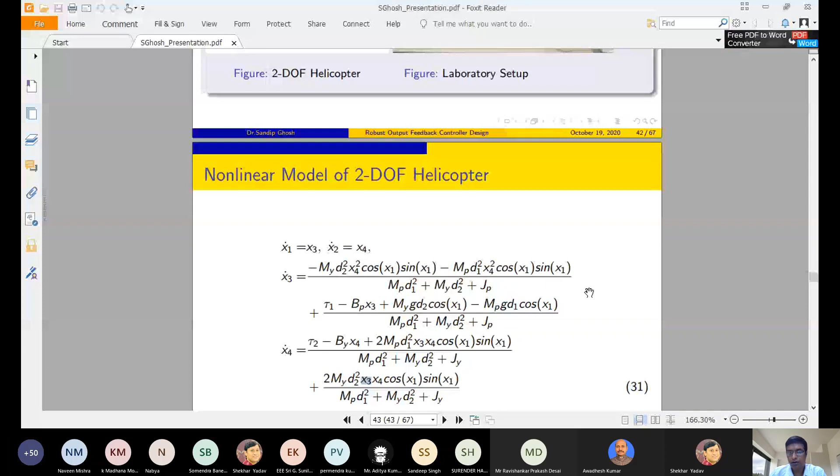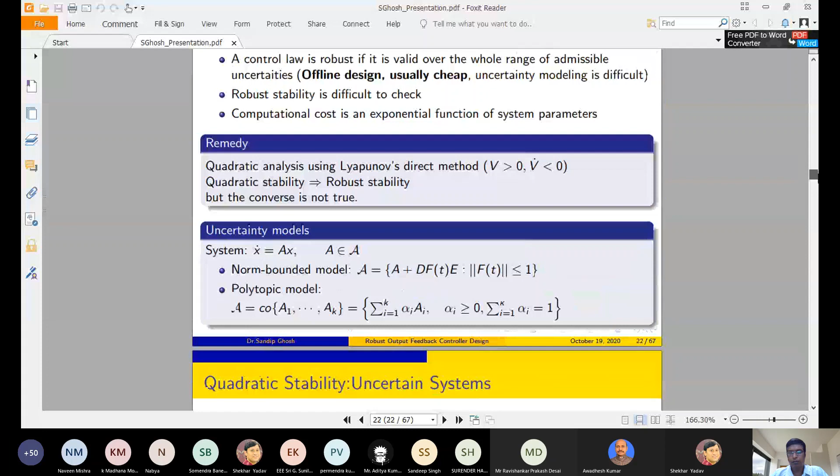Or parameter uncertainties, right? So Sushant, obviously that problem is difficult, and maybe the solution is not available in textbook. So that's what was my objective, to give you the clues so that you can solve it. You can try it yourself.

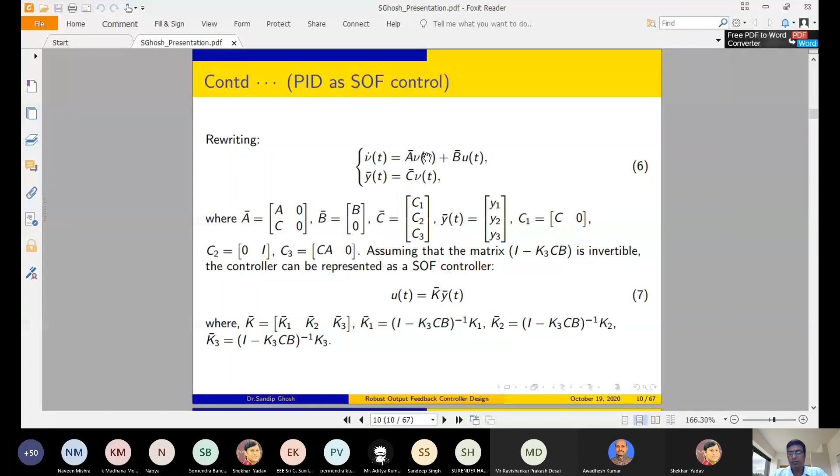So this is the initial slide I showed, the PID controller as a static output feedback control design problem. If you consider this x dot t equal to A x t plus B u t, then u t equals the PID gains K1, K2, K3. In the model, you can represent this as a static output feedback problem, right? And then if you consider that this A bar, or the actual plant matrix, is uncertain, then you use any static output feedback control problem.

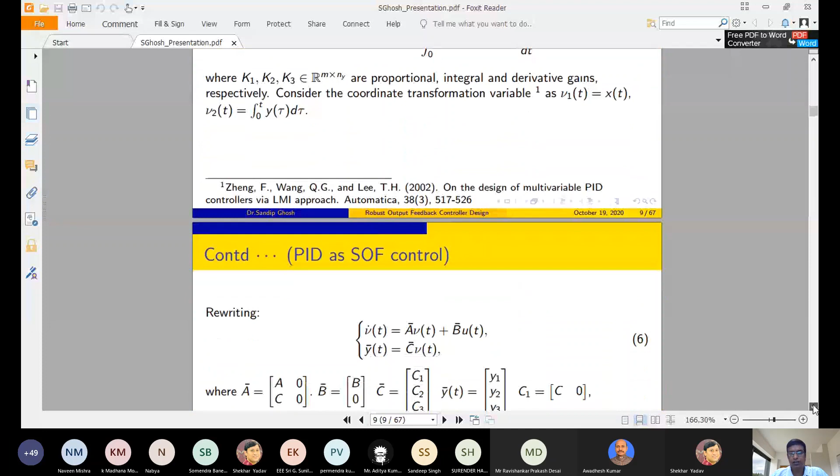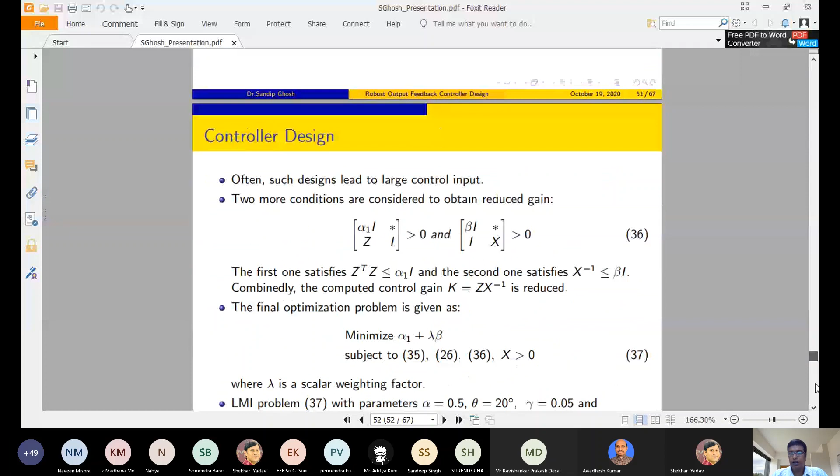The solutions for this static output feedback framework, obviously you have to link. For example, this paper particularly takes the H infinity controller design with regional pole placement. So that does not explicitly take care of uncertainties in the sense of polytopic formation or norm-bounded formation.

But you will find other papers that consider particular parametric uncertainties and solve the problem using that. The method, if you follow in this paper, can also be extended for parametric uncertainty cases, or when there are uncertain parameters present. Using the method, you can go back to defining the Lyapunov function, and if you follow that design method, you can develop your own method for norm-bounded uncertainties or other polytopic system cases. There could be a few more papers in this direction from us in that static output feedback in the polytopic framework or similar framework.

Is that okay, Susan? Susan, could I answer your question? Yeah, yes sir, I got the points. Thank you, sir. Okay.